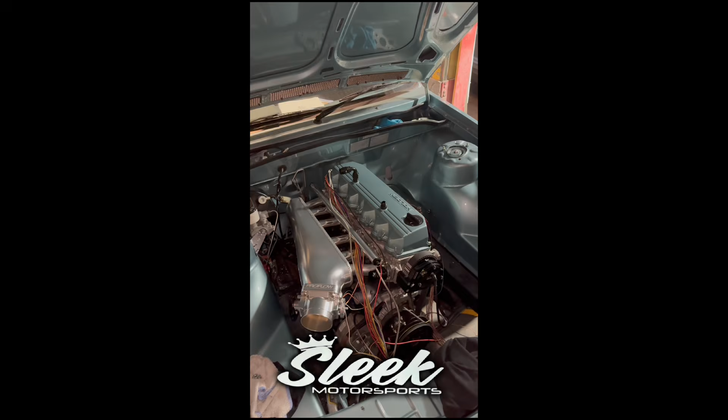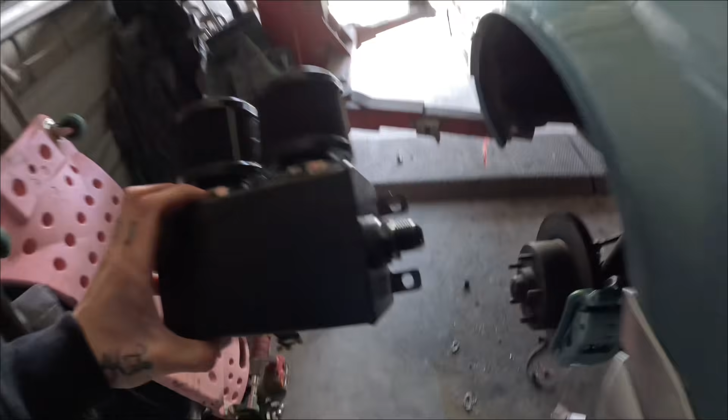In this one we're going to be doing a bit to my VL. Sorry about the noise out there, Pop's just doing a bit to the boat. Yeah, I'm going to be mounting the catch can. Forgot this, just one of the eBay ones, cheapo. I'm going to be putting this up under the guard here. Bit shit lighting, but

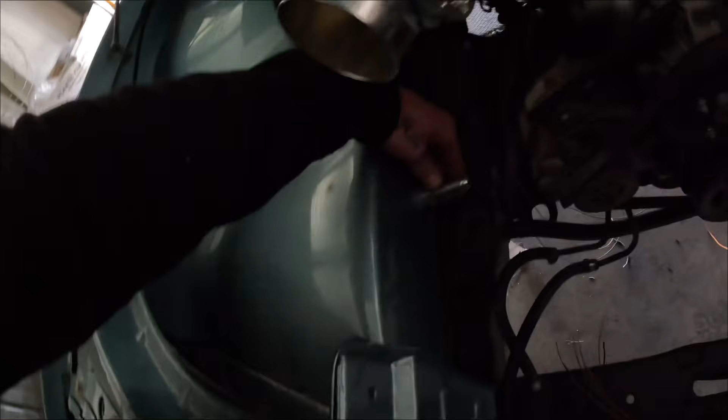somewhat like that. And I've got two bulkheads to go through the rail there, and they will come out one on top of each other just here somewhere, so I'll mark out all that and figure out where they got to go. And then yeah, just run them lines down into the intake there and hook onto them. But

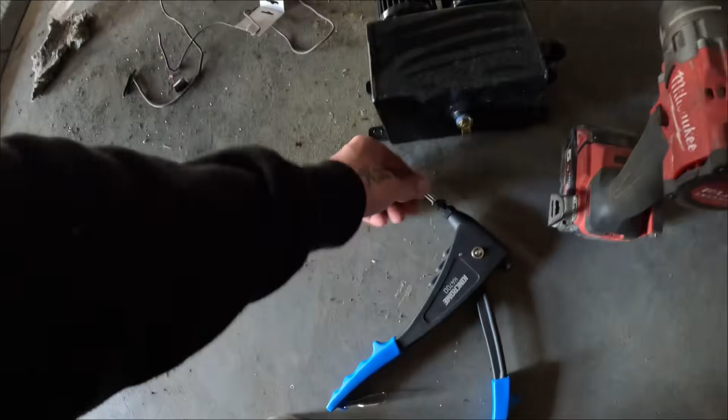yeah, we're just gonna rivnut these in so I can just unbolt them if I ever need to get them out. So it's nice and easy. So I think these are M6. But yeah, I'll drill 4 holes here, get them in, put this up, and I'll show you that.

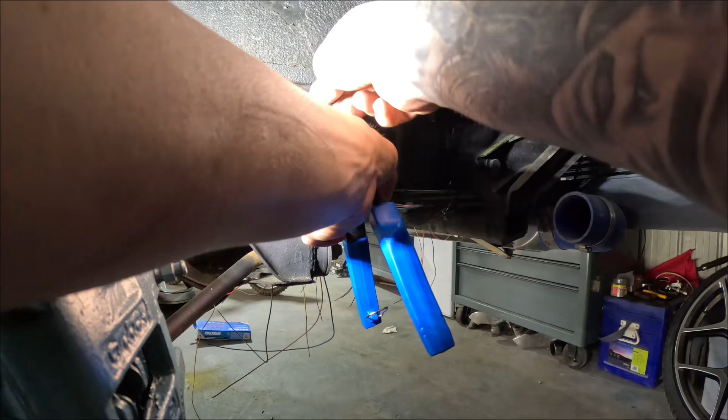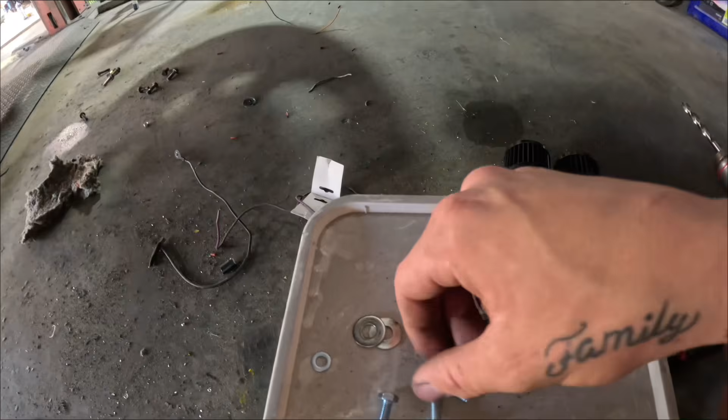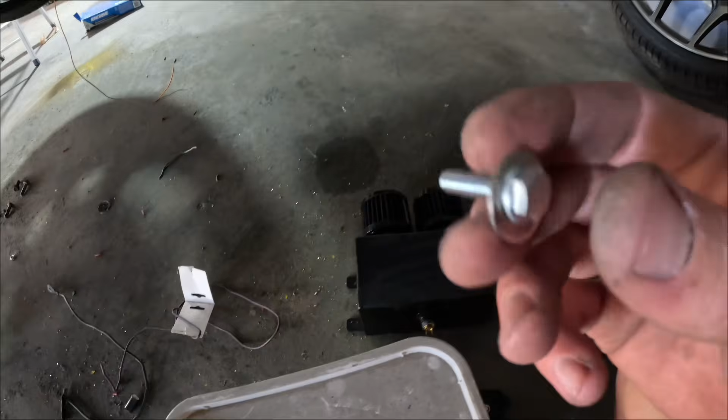Alright, so all them holes are done, the catch can lines up, which is good. We've got just some M6 bolts, hard to do with one hand, but it's got a little washer which will go through that hole in there, so we're just going to double washer that. Isn't a big drama, so I'll just be like that. So yeah, we'll quickly get this mounted up and then we'll start running some lines and get the 2 bulkhead holes drilled and get all this job done.

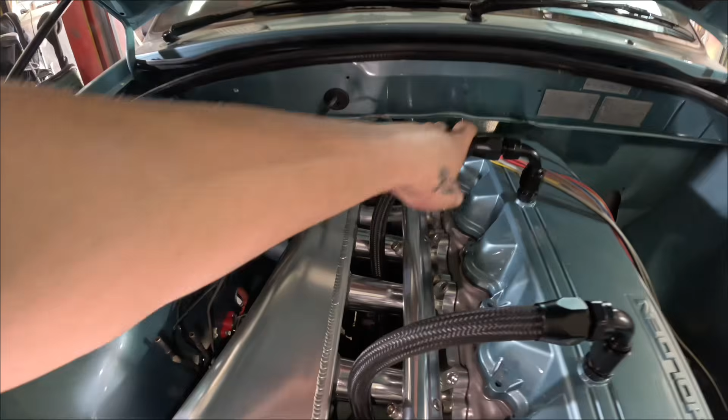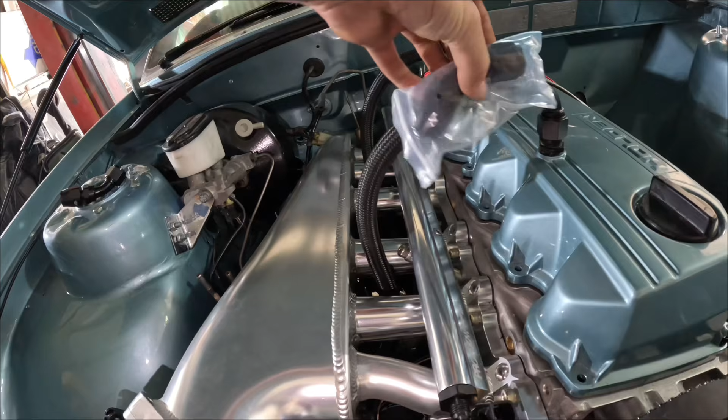Alright, so after a bit of fiddling around, we got both the breathers on there. They're just dropping down in there. That's the best I'm going to get it looking for now. I'm thinking about getting a, what I think they're a 120 degree bend. So, what was that, 45? Oh yeah, there's a 45 there. So I'm going to get them so they drop down a little bit. So it'll drop down here instead of going straight out. But for now it looks alright. Yeah, they're going to there.

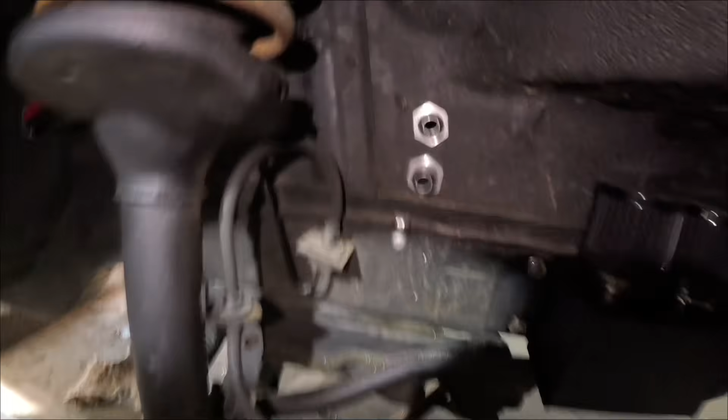And I've got 2 bulkheads there that go through the car there. Got a little connector there. So yeah, it looks pretty good. And they're just coming out there. And they'll elbow over. And then if you can see that, they'll have 2 elbows coming straight up and then connecting to there, so that's all pretty easy. I just got to get 4 more elbows. I just didn't calculate that very good because them 180s won't work.

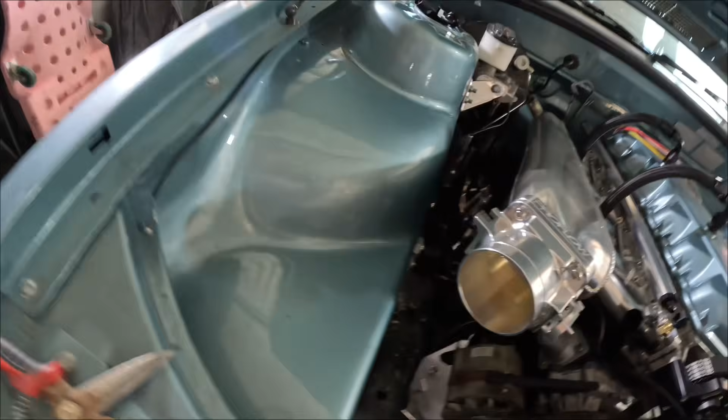But yeah, that's engine bay side done, which is good. That's that ticked off. So we just got to, yeah, finish every fucking else off. Got that adapter today for that, so I can wire my Haltech water temp sensor. Still got to get a plug for that part, but Repco didn't have one, so track down one of them. Then that's that done. Got to get the coil kit, so I can obviously drop them coil kits in, get them wired. That will come with a dizzy block off plate.

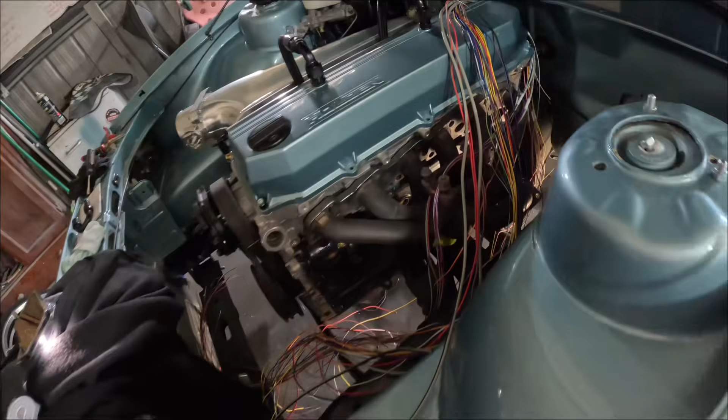Now I just need to order a turbo, injectors, and then that's pretty much it for the motor. So the main things is injectors, coil kit, turbo, external wastegate, which I've got to cut that flange off there for that old wastegate and weld a V-band flange on. And then yeah, I've got manifold, so turbo, build an exhaust, build a wastegate pipe, and that'll be hot side done. I can wire all the boost references and shit into that.

And then I'll mock up all the intercooler piping once I get a new radiator. I could probably do it with the old radiator in there, just so I can make sure everything clears. I just don't want to put that old shitty radiator back in. So yeah, it's going to be 3" down to 2.5" for the cold side, and then 2.5" on the hot side.

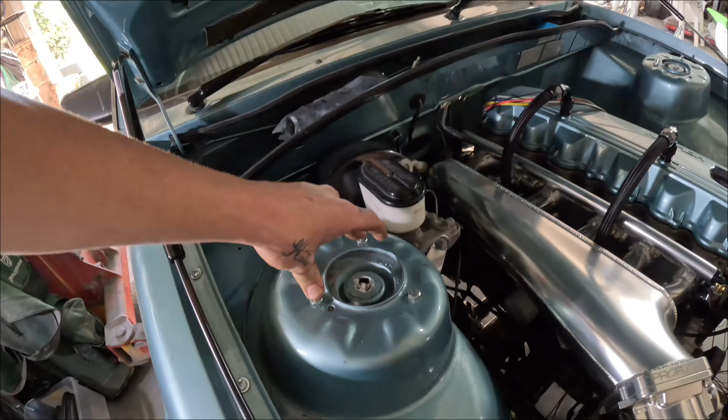But yeah, that's pretty much it, eh? There's not a whole lot left to do other than wire the whole motor and get them parts that I said. I've got caps coming from Low Fabrication that cover them up until I get coilovers. Got these the other day from Low Fabrication as well. Pretty simple, easy fit. Makes it fucking heaps nicer.

Got to get a blank off plate for the aircon there. And then just like a washer bottle. I'm going to put a factory washer bottle back in it just to cover up that shit in that corner. And eventually down the track I'll go a good brake booster like the Wilwood one or whatever they are. But for now that can stay there. Eventually get the LS alternator kit.

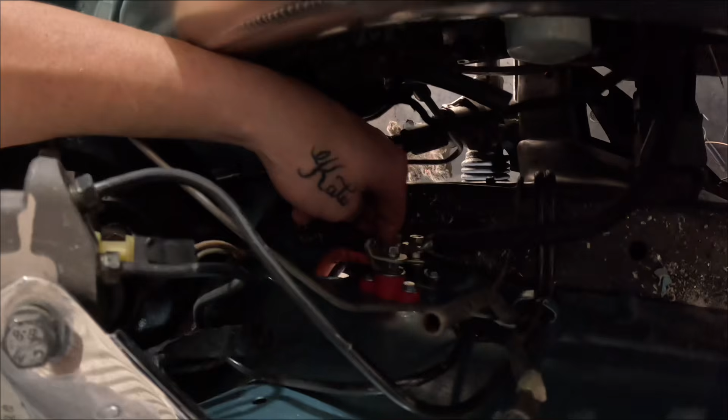But yeah, for now, okay, where do you fucking stop with them? I'll get a nice cap for that too, make that look nice. But yeah, I'm getting really keen. There's not much left to do. I've got 2 poles there for the battery powers. So it's gonna have everything going to it, which it does now. I've rewired all my alternator and starter up.

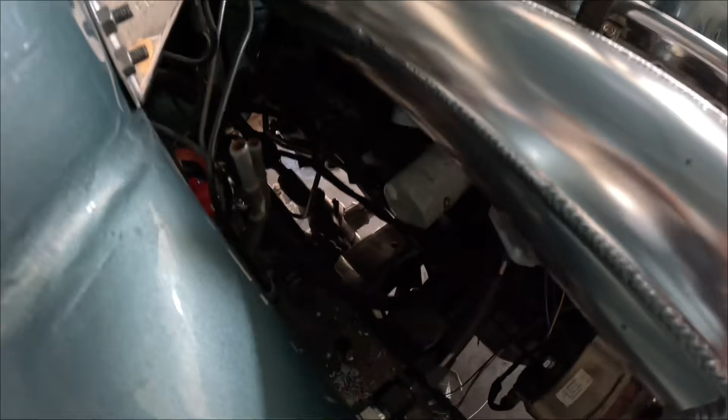So that's that. Them 2 poles there, I've got to fill them holes up first. Got to get some grommets for them. I'll wrap all them up. Got the headlight wiring under there, out of the engine bay. And yeah, that's pretty much it, eh? Just got to start doing some shit. Got some fresh wheels on Friday. Fucking in love with them, they look mad.

Once that engine's done, I'll throw up a few photos of before when I bought this car. Literally had nothing in it. It was just a bare shell. So this whole interior I've repainted and put in, so it's all fresh. It's filthy at the moment. I'm going to wire up the dash. I've got that wired up, the head unit. Obviously finish all the wiring and the ECU down the bottom.

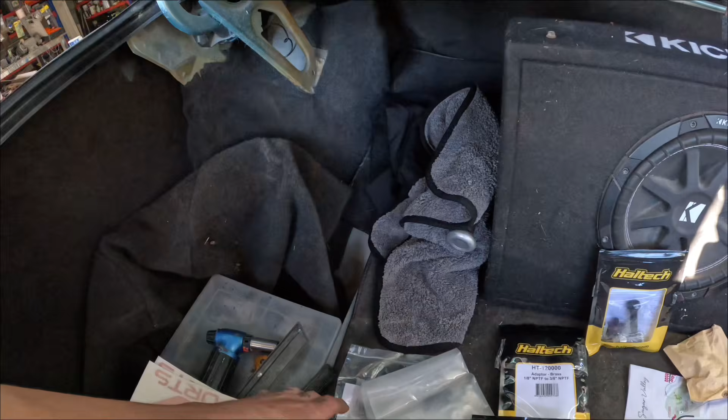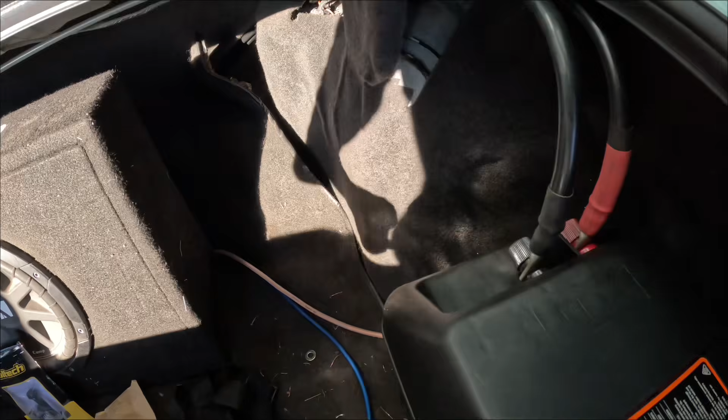It's a fucking pigsty, but we'll eventually get the seats recovered, retrimmed. But for now, it's the least of my worries. And then in the boot, pretty standard. Shit everywhere once again. Got a sub there. I put all the carpet in here. Got the battery box over here with all new power. There you get them lines you see in the front. But I've still got to do a surge tank in the back and run the Astra power steering pump in the back.

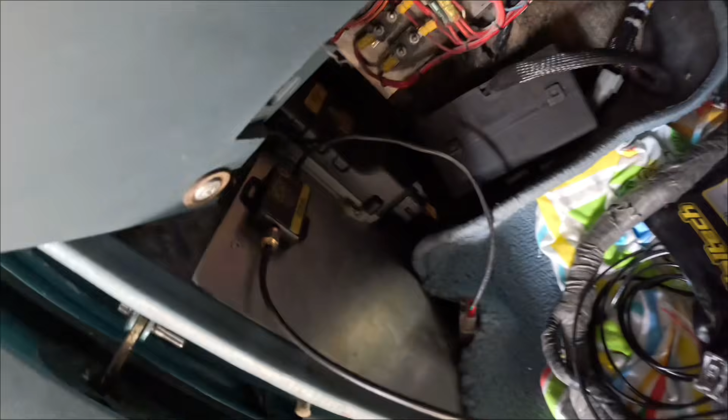Other than that, just got to do all this. ECU, mount that up somewhere. Fuck all this old wiring off. Finish the interior off. Clean everything up. Get it tuned. Get it regoed. And fucking drive it.

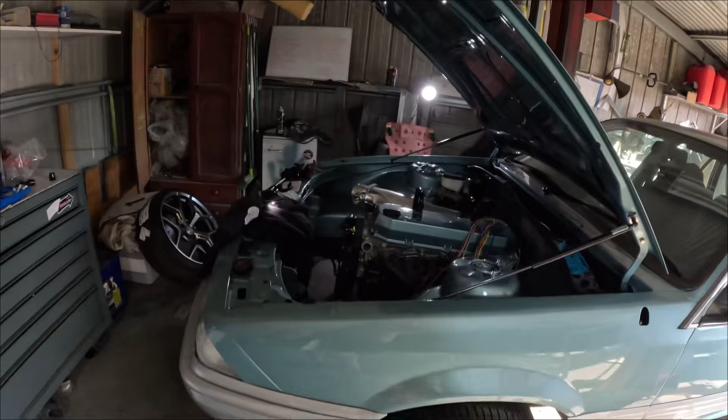I'll see if I can chase these elbows down today. If I can, I'll get them in and finish that off, just so that job's done. And then I might just push it outside and give it a good wash because it's fucking filthy.

How are we, guys? Welcome back to another video on the VL. It's going to be wiring up some of the Haltech harness and showing you a bit of a step-by-step how to do it, and what goes where. I've sort of just pinned everything out to where it's got to go and just started doing one thing at a time, but I haven't got all of my parts yet, so I can't really do much more at the moment.

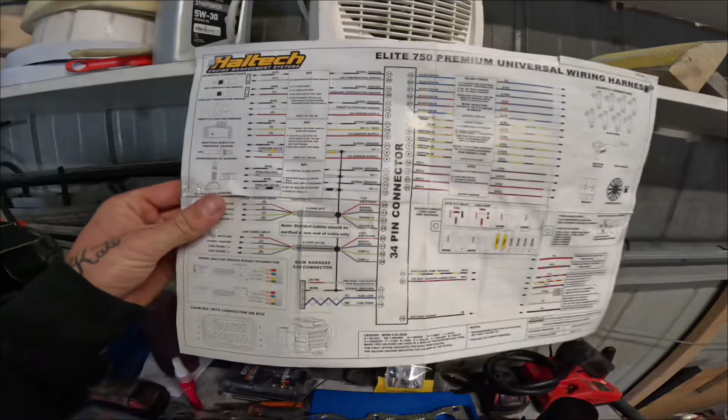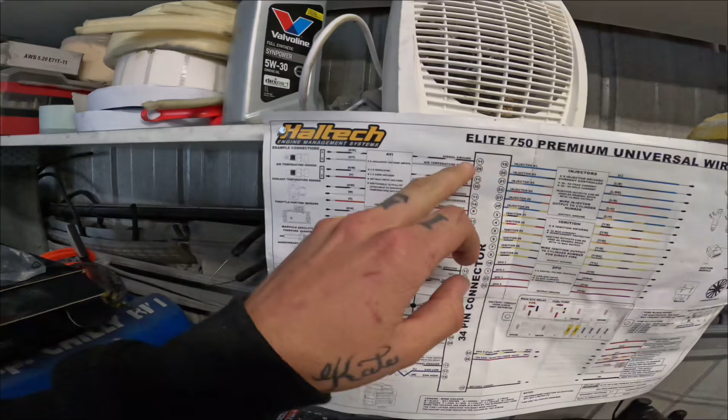It's my first time doing it, so it was a little bit confusing to start off with, but mine is a premium harness, so you just set that up and there's a basic universal harness on the other side. Once you set it up, it's pretty straightforward really. You just follow all the AVIs. You got air temp sensor, coolant temp, throttle position sensor. It's for a map sensor, but RBs don't use one with this ECU. It's built into the ECU, so I won't use that.

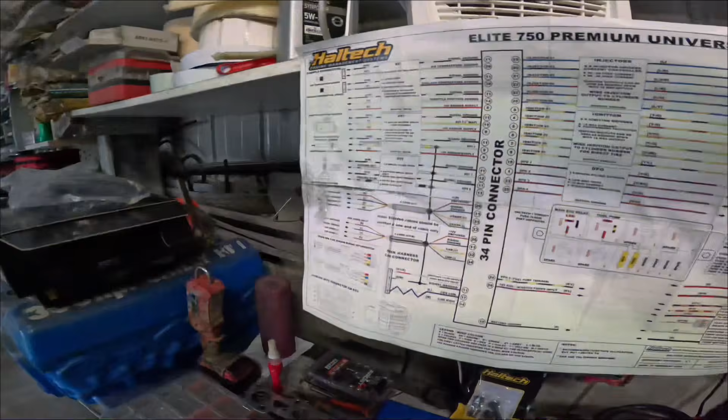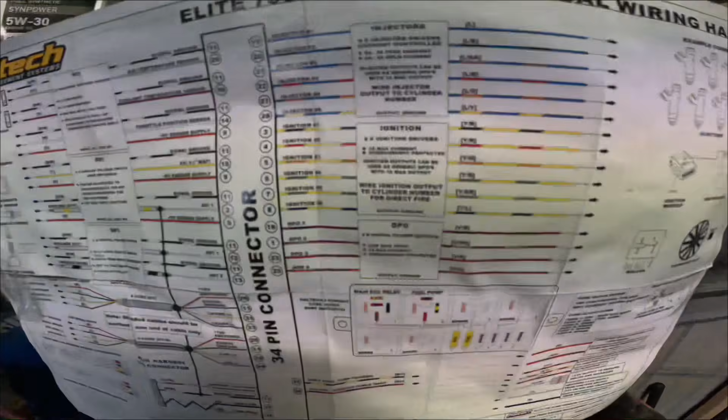So I've used them three there, a spare AVI port for my oil temp sensor, pressure sensor, and then this one here is for the O2 sensor, which I won't use because I don't have it yet, but I will have a wideband one, so that'll be separate. So that's a spare AVI I can use for another pressure sensor. Then you got 6 injectors, 6 coils, so they all wire up to a coil kit and your injectors, and then digital pulsed outputs go to like thermo fans, whatever outputs you need to wire up.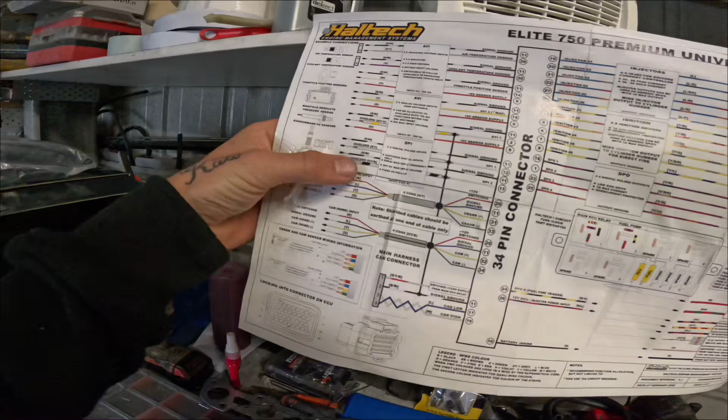And then these are for crank and cam trigger kits. That's for your CAN hub. And these two are just 2 DPIs. So it was all a little bit confusing to start off with, but once I just started figuring out what goes where, watched a few videos on a few things, and yeah, it's all coming

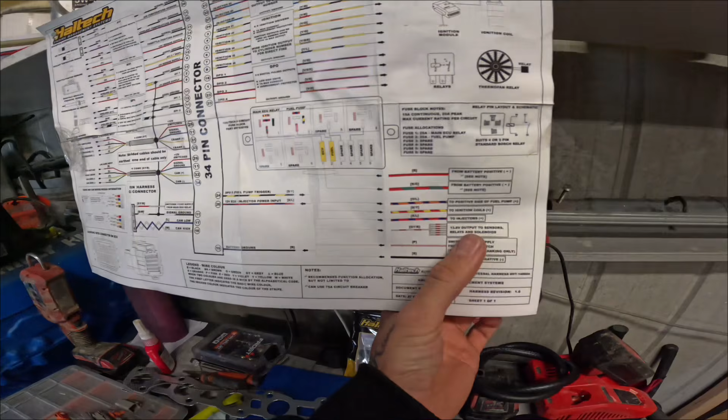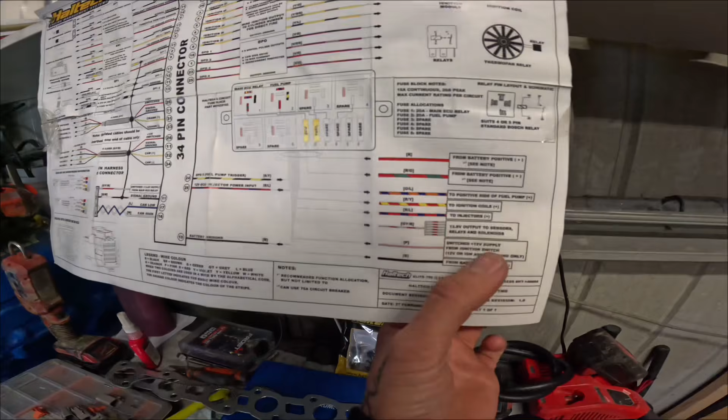together pretty good. These are just some more here, so that goes to the fuel pump, one of them does. Yeah, orange and whatever that is goes to fuel pump, and then you'll have a positive that goes to each coil, and then a positive that goes to each injector. Positives to sensors, relays, negative, ignition cranking, battery positive. So yeah, it's all pretty straightforward once you start getting into everything.

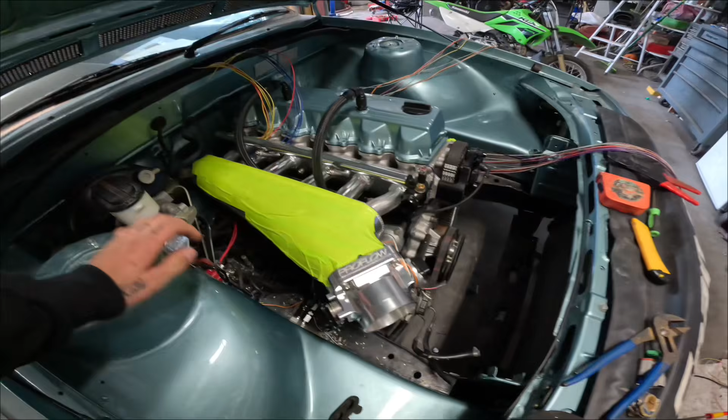But yeah, I've kind of lost a few videos because I started wiring everything up, but I don't know where the videos are going, so you won't see a few things. Like I've done coolant temp sensor, so that's all wired up, and these are a Haltech sensor pack you can get. I'm running the IC7 dash. I bought a sensor kit, which you get a fuel pressure sensor, an oil pressure sensor, and a water temp sensor. So that will run my dash.

So that's that. You'll see me do this one today. It's a TPS, throttle position sensor.

Alright, we're back. My camera just ran out of storage and my spare SD card is at home. So we're back on the shitty fucking phone.

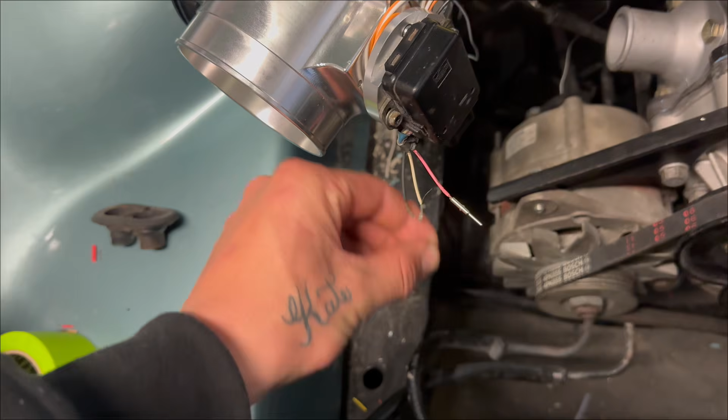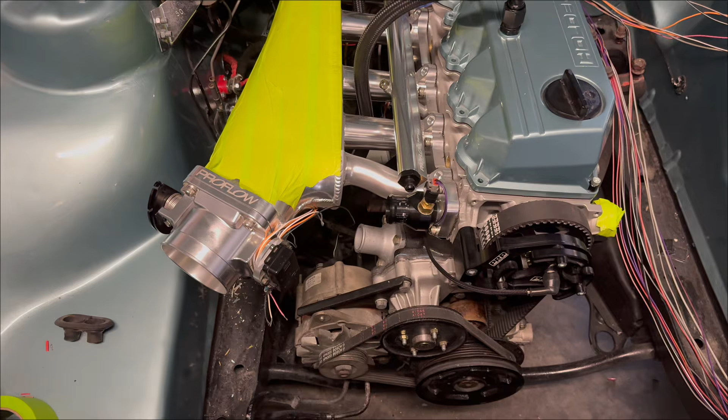But anyway, I was saying this is a standard RB30 auto throttle position sensor, which normally has a plug there, which I've cut off to wire on a different plug, and they have an on and off idle switch at the bottom, which I won't be using for now anyway. So yeah, I'm going to wire that up for you today so you can see that.

But yeah, back with what I've already done, because I can't remember what I got up to in that other video. So we got the cam trigger kit there. That comes down to a Deutsch plug there, they're actually supplied with the trigger kit. And that goes to the black and grey trigger wire. So that's that one done. And then we've got the crank trigger there. So that's on another one of them plugs. So both the trigger kits are done.

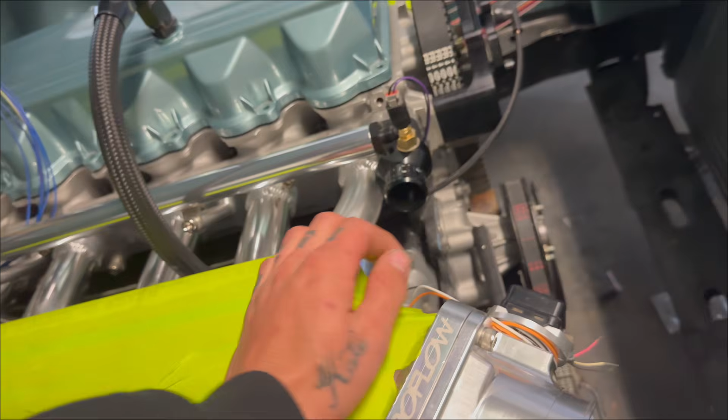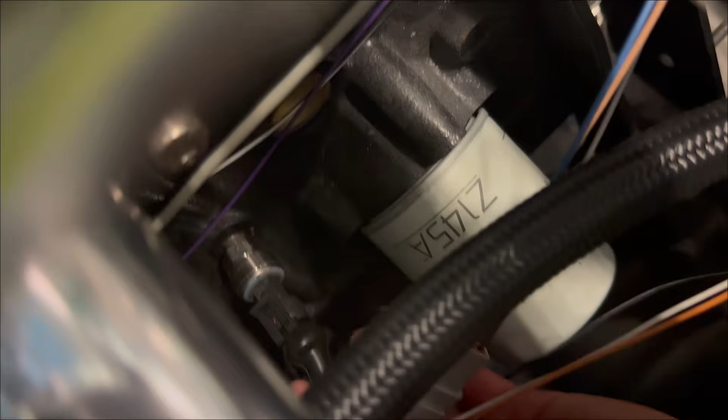I did the oil pressure sensor last night, so that's down there if you can see that. I'll show you a bit better. Yeah, but that wire's up there. And as I said, I've got that wired to this one here, so black, white, yellow and orange, them three there, which are 11, 15 and 9, so that's a spare AVI I've used because I don't need a MAP sensor.

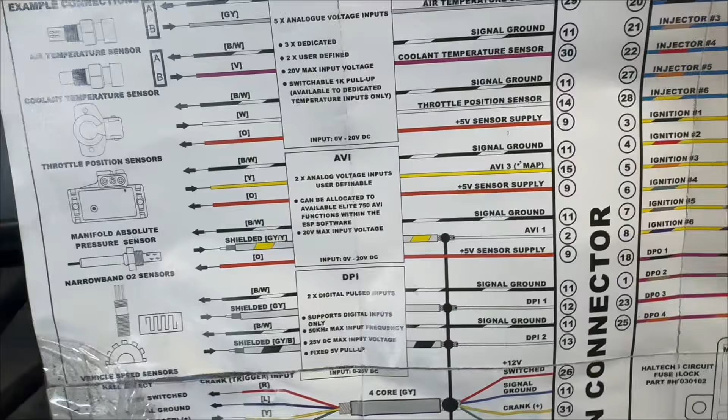Which I thought I'd try and run through this a little bit with you because I had a bit of trouble finding info on it when I started. No one really explained what's what and all that sort of stuff, so I'll try and run through it a bit while I'm doing it so it can help people if they're doing it for their first time as well. It is good to be able to watch a YouTube video and figure out shit. But anyway, back to this.

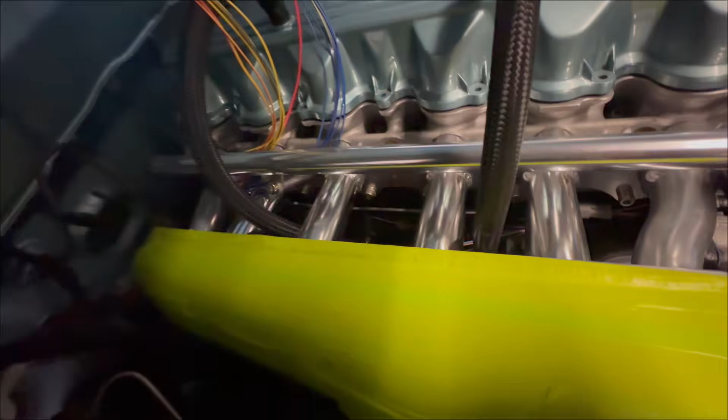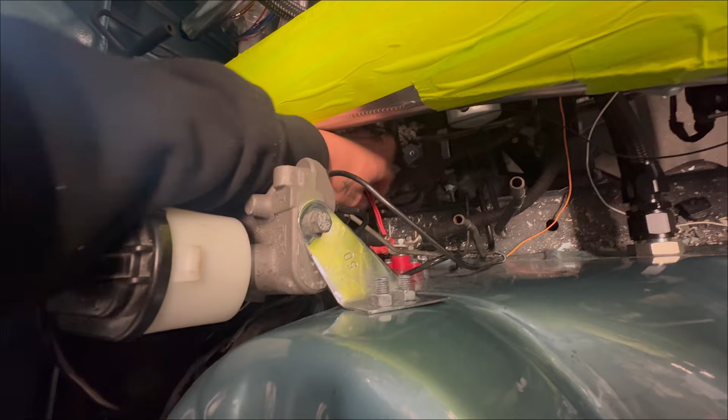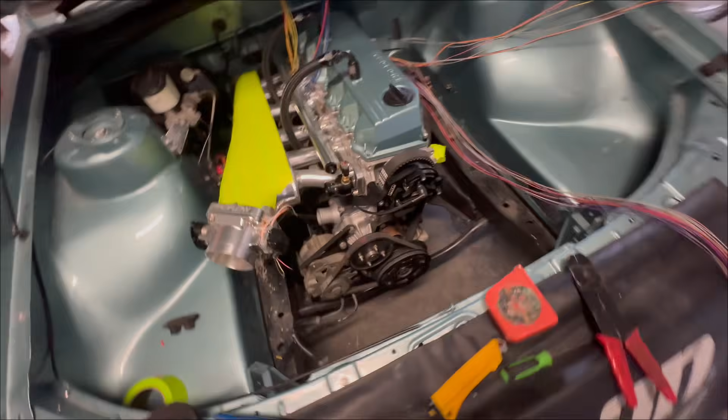So both trigger kits are done, oil pressure is done, water temp's done. What else have I got over this side? Main power for the ECU, so earth and power there, and that one's for the fuel relay, I think. So obviously all this will be pulled back out, and I'll get harness tape all over it, wrap it all up nicely. But yeah, this is the throttle position sensor here, so we're going to wire this up today because I got a plug this morning for that.

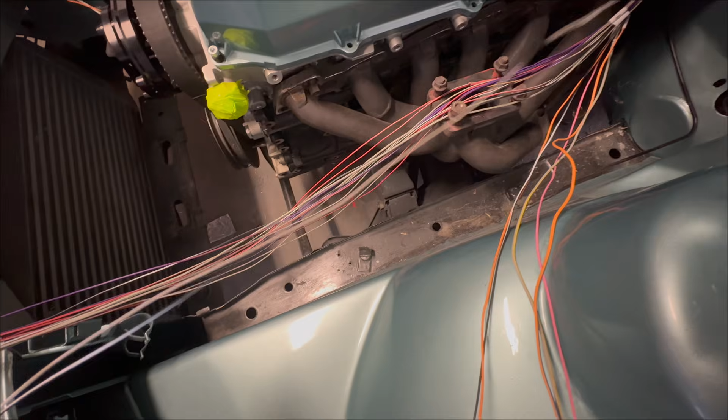So I'll show you where to find your pinouts for them. I'll run that behind that breather line. We'll hook that up, and I'll show you a few wires here. So what have we got? Air temp, so that'll go to the front of me turbo, into the intake piping, so that one can get put out of the way. Got digital pulsed outputs, so they will all stay there because I'll need to use some of them for me thermo fans. And I think these are DPIs, so they're inputs, so I'll probably still use some of them.

And then all these are, I think that's fuel pump. Yeah, so positive side of the fuel pump, which will go back in the car. So I need to pull that back through and run that back to the fuel pump. And the switched 12 volts, so we've still got to figure out that one. And that's another spare AVI there. And that O2, so that's another spare AVI there I can use for probably a fuel pressure sensor.

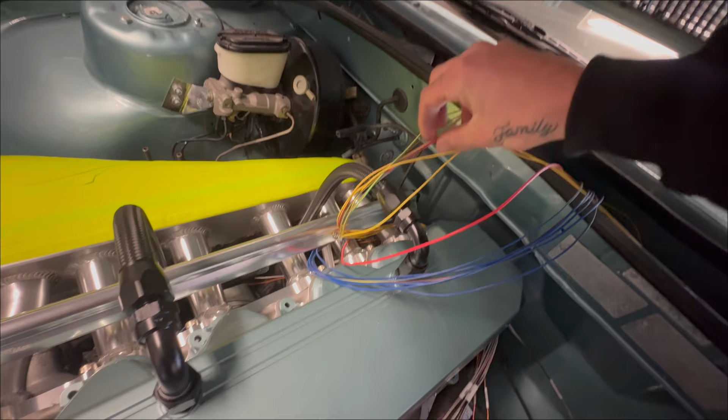But yeah, that's all that. And then these are the ignition and coils. So obviously you got your main power, which is that one there. So with them, I think they're coils. Yeah, they're coils, so yellow's coils. So you run the 6 yellow wires there.

You run 1 to each plug on your coil, and then you have to splice this red one into each one. So I'll show you that in the next part when I get my coil kit and injectors, and then the same for injectors. So that'll tidy all that up. And then, yeah, there's not much else really left.

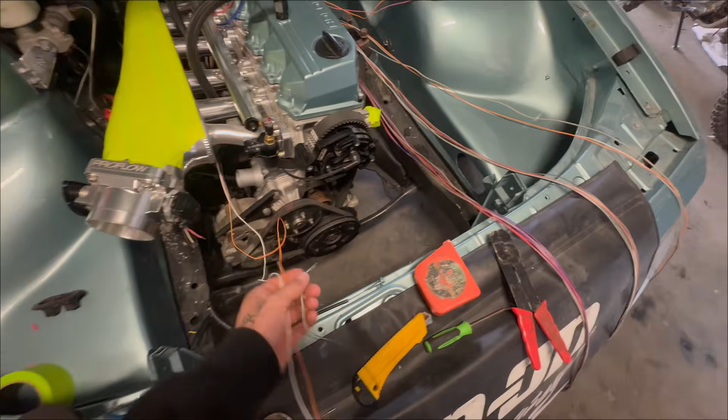I've just got to finish off all them, obviously, but I'm going on a holiday in 2 weeks, so I'm sort of limited to spending money on it at the moment, which is a bit annoying because I want it done. But yeah, I'm going to stop talking, and I'm going to show you how to find the pin outs for these and whatever else if you don't know that.

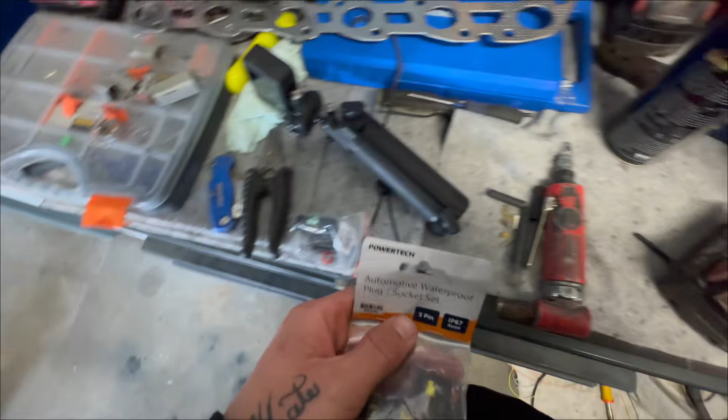So I've run out of Deutsch plugs. Ooh, what's that? I've got another one there, but I haven't got a 3-pin one. So I just went and got this one from Jaycar. I don't know what it is, PowerTech, but it'll still do the job. So I will wire this in, and that goes

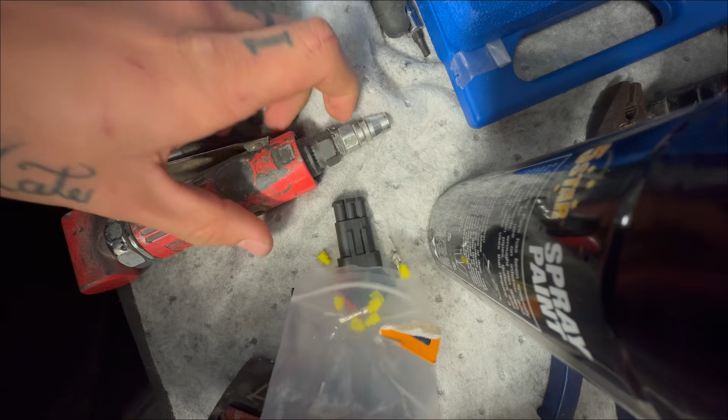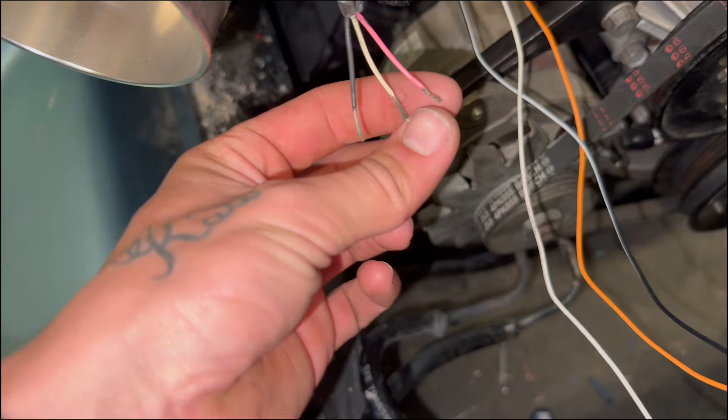to the throttle position sensor, which is this one here, 11, 14 and 9. So black, white, white and orange, which you can see there's black, white, orange and white. From the Haltech page, I figured out that the pink is to go to orange, so that's the power, 5 volt power. White is signal, so it'll go to the white, and then the black goes to the black and white, which is the signal ground. So I'll quickly put some plugs on these and I'll join that up.

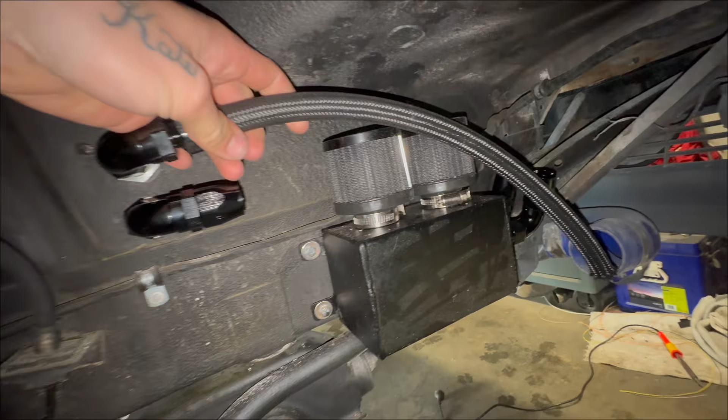Alrighty, so you would have seen in the other part that we got the catch can mounted under here. It's got 2 bulkheads coming out there, and that's going to be like that over to that end one. So we'll pull that end one off and get that elbow on it. So yeah, that one done. So that just runs straight over to there.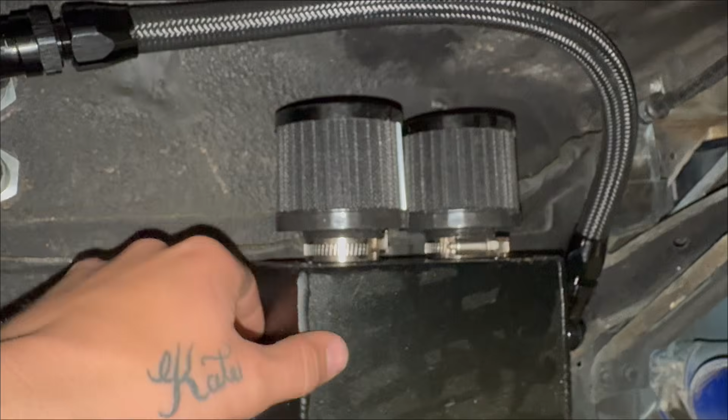And yeah, I have left it a little bit longer because when I put this in, I didn't really think of it, but when I turn my tyre, it might hit it. So I might need to move it that way a little bit. So that's why I've left it a little bit longer, but yeah, that's that one done. I'll quickly do the other one. And these are pretty simple, there's nothing really hard about them.

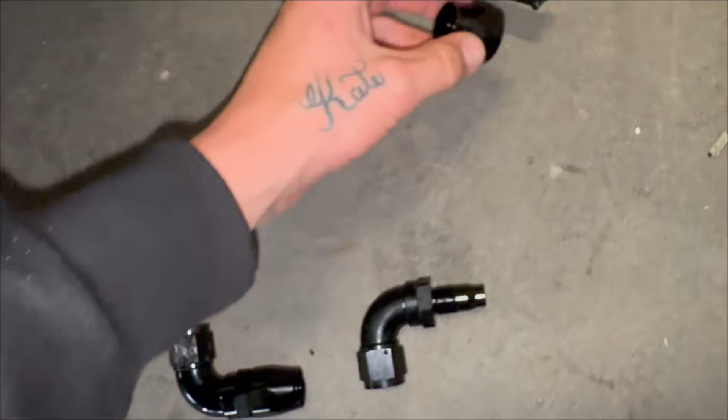You undo that. Then you've got this. You slip onto there, and then you just screw that into that and tighten it up until it's tight. And then they have a swivel end on them anyway, so you don't have to worry about having them in the right spot. So I'll quickly do this one. Righto, so we've made this one up. We will quickly get him in. It'll be a bit hard on camera.

Might be right. Have you got a Samsung phone?

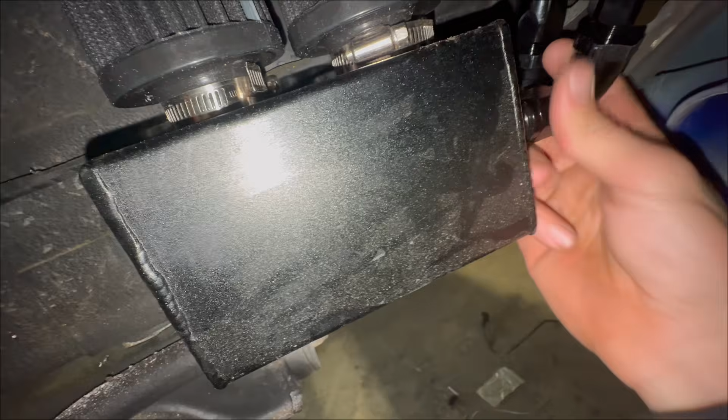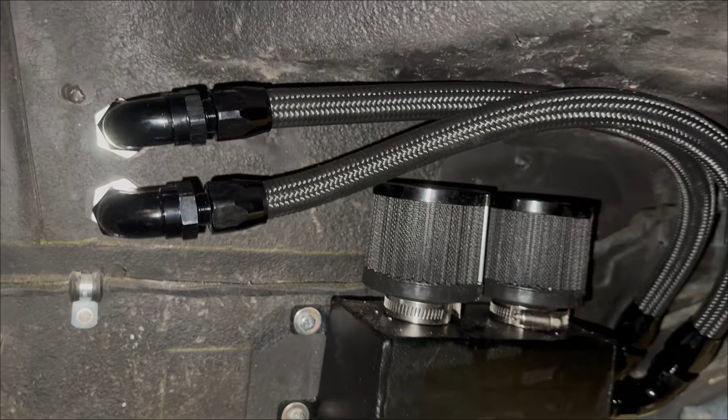Alrighty, so that's the breathers all done. Definitely doesn't look the neatest. I will eventually shorten them, but I just want to make sure the wheel's going to clear that when it's full lock. So yeah, they can stay a little bit longer for now, they're all tight. So I'll put the wheel back on, get it down.

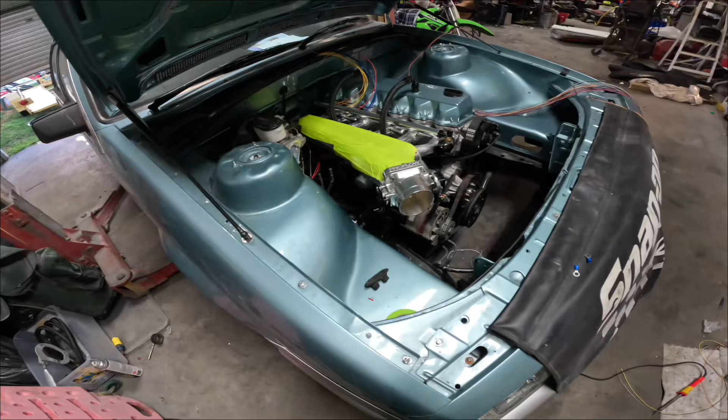Alrighty, we're gonna wrap this video up here because there's not much more I can do until I get some more parts. So we've got breather lines fully done to the catch can. Got TPS wired, got coolant temp sensor wired, both trigger kits, oil pressure, main power's done down there. Tidied a few things up. We've got the radiator over there that I've just painted. So I'm just going to put that in until I get a brand new polished one. But just to get it all running, I'm going to use that.

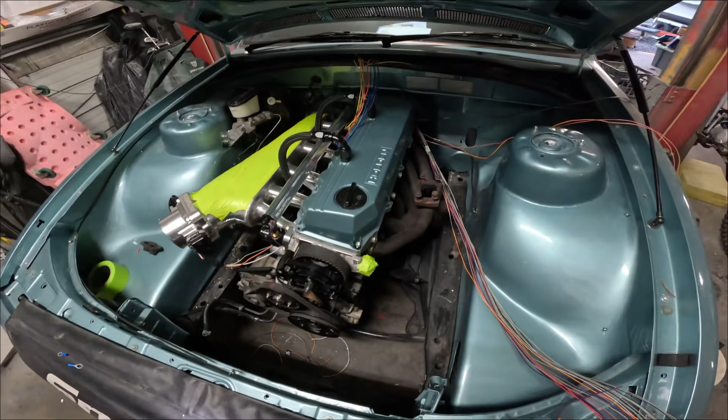I don't know how well you can see it, but breathers are all done into the catch can, and we've got some of the Haltech wiring started. So yeah, I need injectors and coil kit next so I can get all that wired. And then I just need to get a few more things like turbo and intake piping and all that sort of stuff, and get all the rest wired. But that's going to wrap this video up.